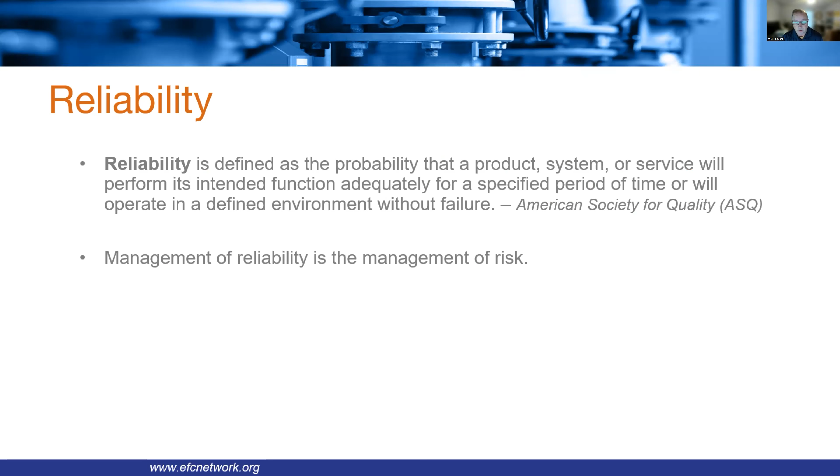Management of reliability is the management of risk. So what's the definition of risk? Risk can be defined as the probability or likelihood of an event or situation occurring that may result in adverse consequences, harm, or negative outcomes. In everyday life, risk is often associated with uncertainty and potential loss, damage, or unexpected events. It involves addressing the possible outcomes, their likelihood, and the potential impact they may have on one's objectives, assets, or well-being. Managing risk typically involves identifying, analyzing, mitigating, or controlling potential risks to minimize their negative effects and make informed decisions. The flip side of that is opportunity.

So what does reliability really mean? For customer satisfaction, that means no surprises for loss of city water to their home or business. Customers are well informed ahead of maintenance, the reason for the maintenance, and able to give input on the maintenance if it severely impacts their operation or health. Reduced operating costs can mean motors and gearboxes are laser aligned and run with fluids appropriate for their operating temperature, load, and operating environment, and not just according to the manufacturer's recommendations.

LED lamps are even used as appropriate to help reduce energy spend, along with reduced chemical and energy spend overall.

Chemical feed pumps are calibrated regularly, and leaks in the system and distribution system are identified and corrected. Those leaks can cost a lot of money. Last I heard, most systems have about 20 to 25% water leakage in their distribution system, so that's a huge impact on the plants. There's a lot of energy that goes into pumping and chemicals used on water just to get dumped in the ground, and fixing that has been a big endeavor for almost all utilities.

Improved compliance means QA/QCs for analyzers are a way of life, done at intervals necessary to maintain compliance. Operational preparedness means knowing consistent system conditions when there are large community events like holidays, and distribution or collection system maintenance happens ahead of time, so operators can plan for adjustments in advance.

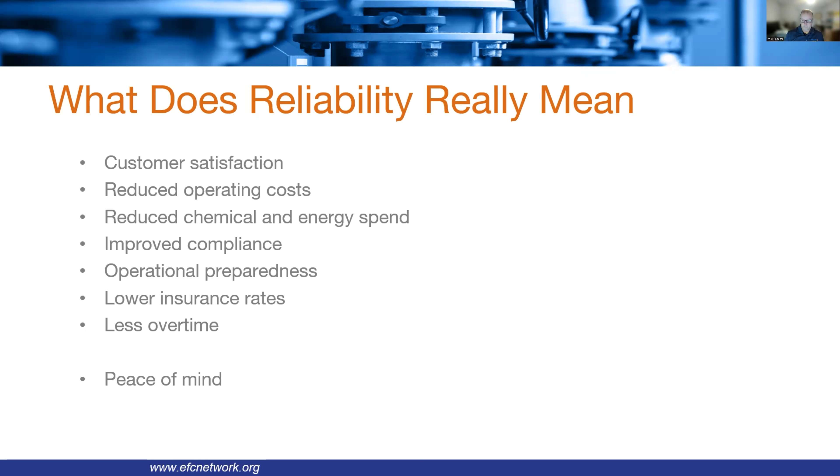So reliability is really risk management. For operations risk, consider: my primary ferric chloride pump just failed—did I know the backup ferric chloride pump was down for service? For safety risk: did I know there was a chlorine leak before I went into the room to make a feed change?

Have my chlorine leak detectors been bump tested? For quality risk: my effluent chlorine analyzer says we're in compliance—have the operators been doing rounds to bench test our analyzers? Have we done QA/QCs on all analyzers, and how do we know?

Financial risk: our operator says high service pump one, which can produce 20 million gallons a day, is vibrating so badly you can feel it when you walk in the room. Did we know that condition beforehand? Did we have a plan to pull and repair it safely? Did we budget for renewal and replacement of that pump? And how quickly can we get it rebuilt?

Environmental risk: we use aqua ammonia in our post-treatment and store it outside in large tanks. Have those vacuum relief valves on the tanks been tested? Have the pressure relief valves been tested? Has the tank thickness been tested, and how often has this been done? There are other compliance risks and others—these are just examples of risk and things that need to be managed to mitigate them.

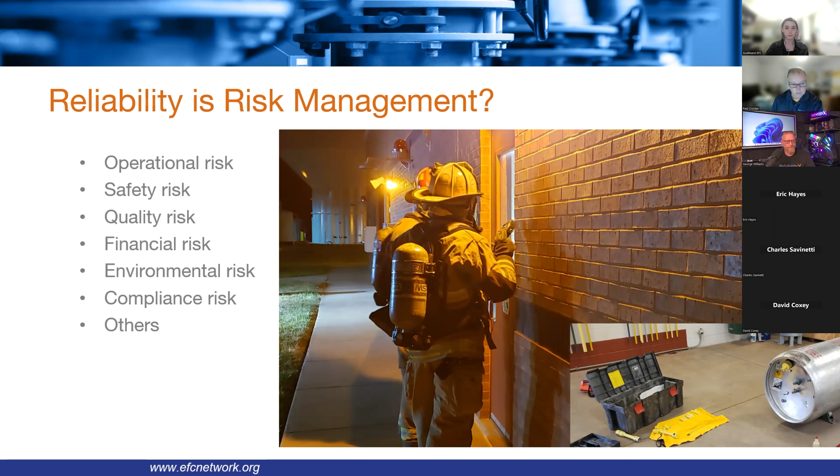Often in water utility plants, redundancy is built in to help mitigate risk. Mathematically, if we've got a couple of redundant pumps at, say, 99% reliability individually, the system itself is now at 99.99%. However, as soon as one of those redundant pumps fails or is out of operation for maintenance, you've lost that redundancy and the risk is immediate. So maintenance and reliability isn't only about building in redundancy to reduce risk, but also managing the risk once that redundancy disappears—we'll talk all about that.

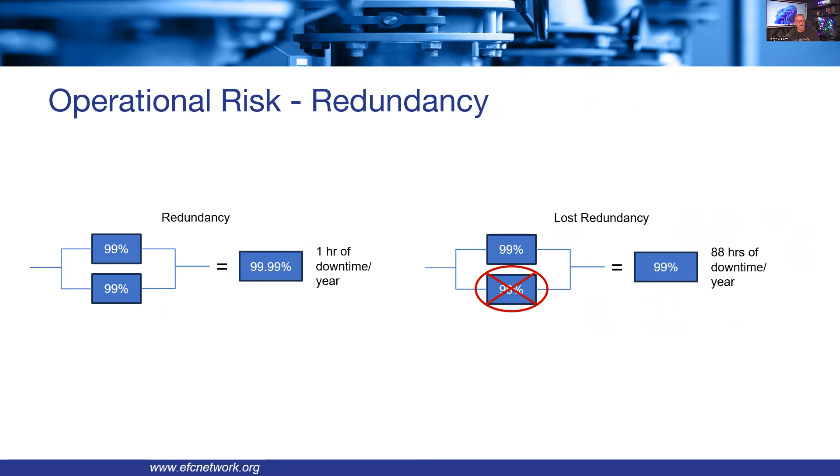From an ANSI standpoint, the average mean time between failure—the average lifespan before some component fails, whether it's a seal, a bearing, or impeller wear, whatever the case may be—is about 2.5 years.

For organizations that are more reactive, meaning they run their equipment to failure, that average is only 1.5 years. For organizations that are very proactive, actively utilizing predictive technologies or robust preventive maintenance strategies, their average mean time between failure is 4.5 years. So you are three times more likely to have events if you're a reactive organization than a proactive one, and of course each of those events has a cost.

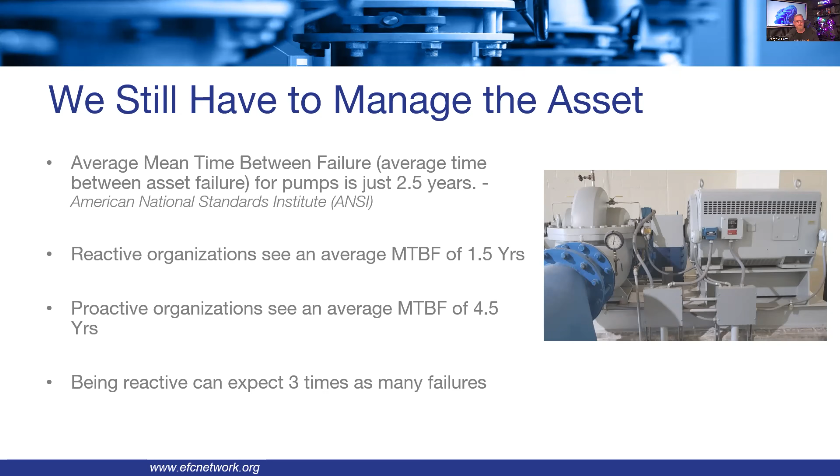In addition to just the risk of the organization from an operational perspective, there's also a safety risk involved in being a reactive organization. What you see on the screen are 2 studies from independent sources. One is from a gentleman named Ron Moore, who's the author of Making Common Sense Common Practice and has been in many, many facilities to do studies. Most of where he's at is in the manufacturing space, but the same rules apply. The more reliable the plant is, the better the safety record and the lower the recordables are.

On the right-hand side, we've got a study from 2000 from the American Society of Safety Engineers that looks at executing your PMs on time, a reduction in overall equipment downtime, and the impact that has on the safety record. You'll see that all of those trend lines are going in the right direction, which is down. This is a documented, quantifiable set of data that tells us that a reliable plant is a safe plant, and a reliable plant is a compliant plant.

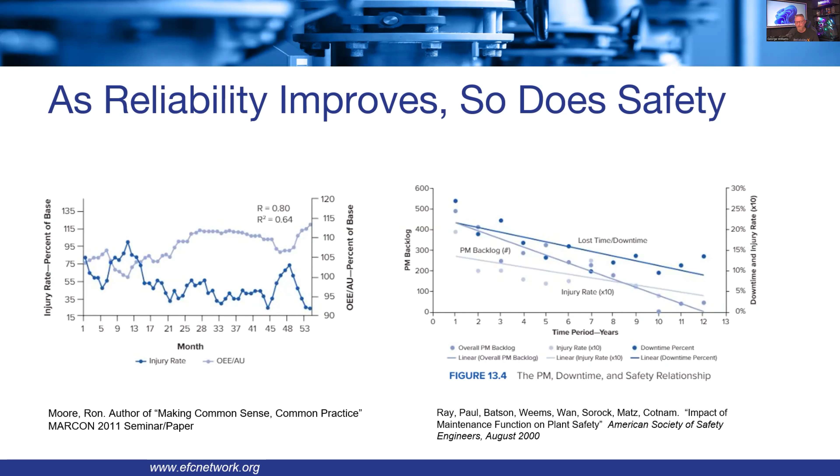If we think about reactivity and proactivity in simpler terms, the difference between a Model T Ford that's currently rotting in the earth and one that's drivable and in pristine condition is not just how well the mechanic took care of it, but also how well the operator took care of it.

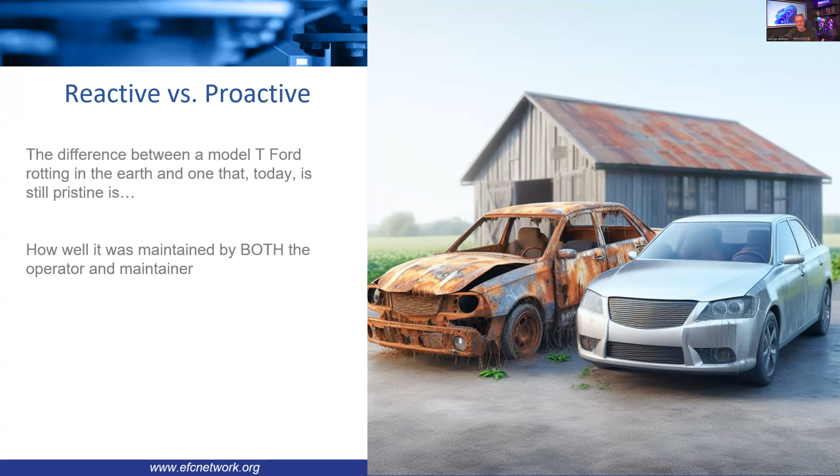So reliability is really about what are we doing physically with the asset? How are we interacting with the asset? How are we inspecting it? How are we maintaining it from a preventative maintenance perspective? What are all the activities that we do to help ensure its longevity of life and its risk mitigation factors associated with plant operations?

We've really got 3 choices, and we'll dig a little deeper into this in the next couple of slides. You can either spend too much and be incredibly reliable, but wasteful because we're spending too much. You can spend too little, at least your budget can say we're going to spend too little, and be very reactive and have excessive failures and have to rush order parts in. And what that leads to actually is more waste, because you're going to spend more than is necessary to keep the plant in operation. Or you can manage the risk appropriately between the risk event and the cost of mitigating that risk and be at the more optimal cost level.

So it's really just one of 3 things to do. We can spend too much and be really reliable. We can spend too little and be very reactive, in which case our costs go up. Or we can manage the risk appropriately and spend an optimal amount of money, have a good, clean plant, a very compliant plant, and a very safe plant.

So what's the difference? A reactive environment will have basic PMs, often on things that shouldn't even be PM'd, like checking lights or room lighting. There are limited inspections, not inspecting the right things, limited or no use of predictive technologies, or when they are used, training wasn't given adequately for those technologies.

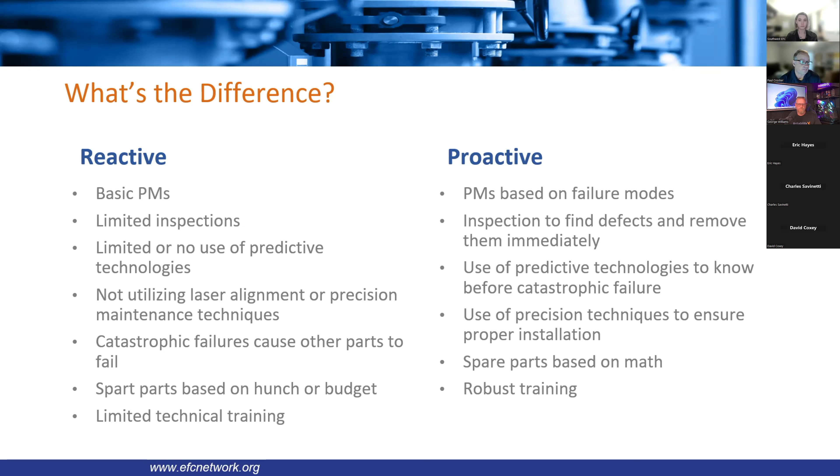So the bottom line here is that we have to take care of our assets. Otherwise, the assets are going to manage us. You've got two choices. You can actively manage your assets, or your assets are going to manage your day-to-day operation. If in your head you think about the plant on a day-to-day basis, if each day there's a different emergency and somebody has to respond to that from a maintenance perspective, then the assets are managing you. They're managing the operation and they're deciding what you're going to do and what you're going to spend.

In the inverse of that, when you're actively managing asset risk, there are technologies and human intervention ways to ensure that the asset is giving you a good health indicator. You're checking the condition of components that fail. Generally speaking, the asset as a whole is not what fails. The parts fail. And there are methods to assess the condition of those parts.

Some of those parts are designed to wear out, like the brakes on your car. Some of those parts are designed to last a lot longer if you install them with precision, versus if they're not installed with precision and they just don't last as long. And so we have to actively manage through a strategy how to take care of each and every individualized asset so that we can be at the appropriate cost and have the appropriate level of risk in the organization.

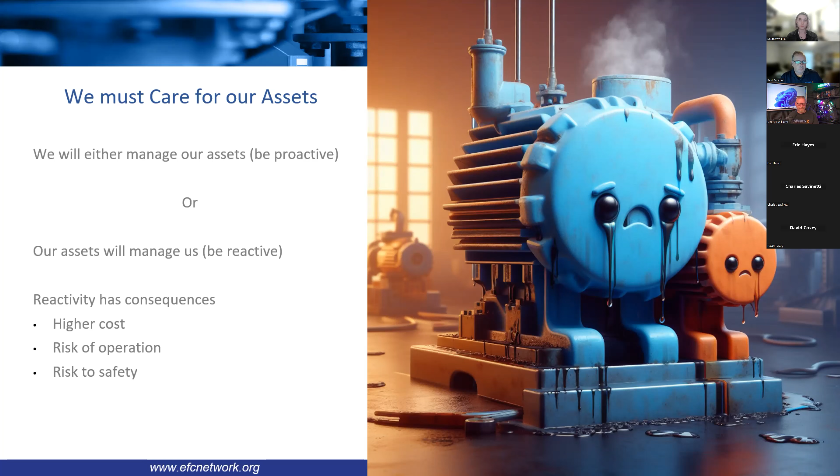To sum this up, your assets have an attitude. Whether you like it or not, they don't care about your budget. They don't care about the board. They don't care if you're a small utility or a large utility. They don't really care if you have to go to a recital or a soccer game tonight. They're going to fail at the most inconvenient time. They just don't care about your desires.

It's not about your desire. The board can say, I only want to spend X on maintenance, and you're still going to spend more. The reason you spend more and pull it out of another fund is because you didn't spend the appropriate amount of funding to keep the asset at a minimal cost.

There's just not - when you buy a car, you either buy a Toyota Corolla or you can buy, I don't know, back in the day, a Yugo. They have a completely different expectation of reliability and a completely different expectation of cost to keep them operable. It is baked in, it is designed in, and you as the operator don't really get a choice.

If you decide not to change the oil and the engine seizes, that's the choice you made. I guess you do get a choice, but it's about whether or not you're going to do the appropriate level of maintenance required for the design of the asset that you have. And if the choice is we're going to spend less, you will ultimately spend more. And that's just kind of how this works.

And so the reliability is about understanding and coming to the conclusion of what the right spend is. Not too much, not too little. How do we manage the risk and keep the cost as low as possible?

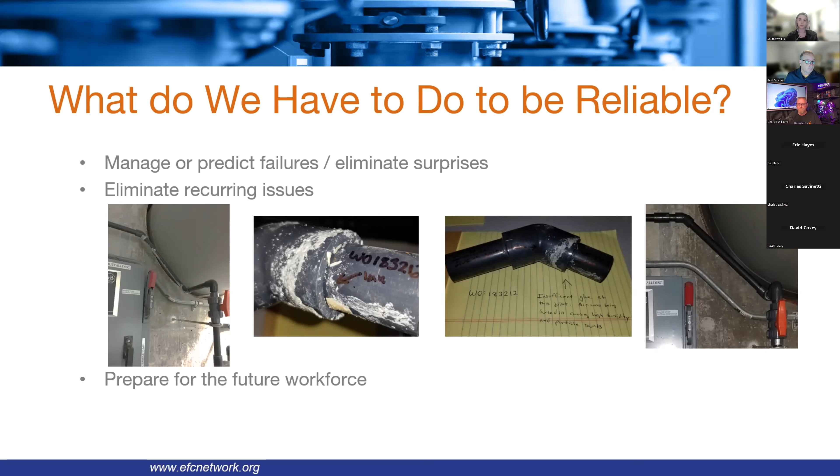Use of technology can give you an advance notice. If you haven't started anything at all ever, then lubrication analysis should be your first go-to, especially for equipment that has oil in it that you can pull samples from. That one's cheap and easy — it's $35, you send it to a lab, they do an analysis and give you some things to do to address what's seen, and that can be tracked and trended over time so you can see how your efforts to correct those situations play out.

Ultrasound for structure-borne and airborne is another great tool. It's easy to acquire, fairly inexpensive overall, easy to test and use, and it can be used on all kinds of things. We used it to find chlorine leaks on valves that we wouldn't have found any other way, tank thickness with ultrasonic thickness gauges, infrared thermography and vibration...

Analysis and motion amplification are some very advanced techniques. Only the very largest of plants can really afford to bring those in-house because they take specialized training and skill. Even though infrared thermography seems simple, it's deceptively not simple, and it really requires somebody that's had training on using that. So those are things you can outsource.

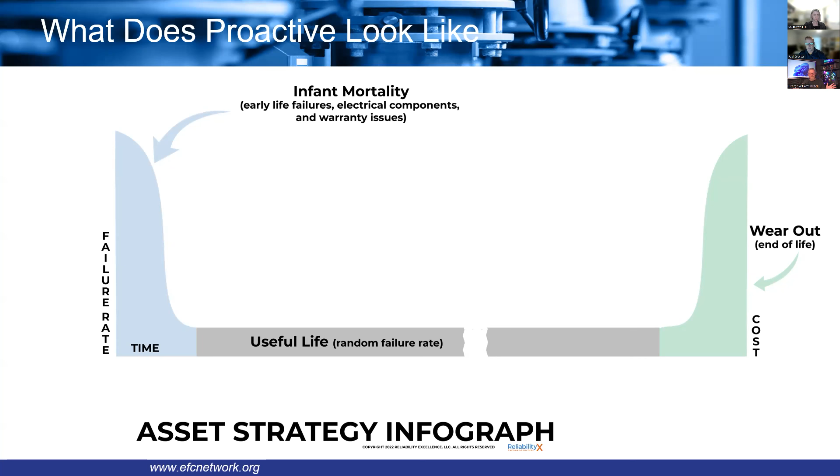Just doesn't happen, really, really low probability. That means all the events are random. If I take a grease gun and don't wipe it off really good, and I squeeze in a speck of contaminant into one of those pump bearings, eventually that bearing is going to fail before the other bearings in the other pump. That's just the way it works.

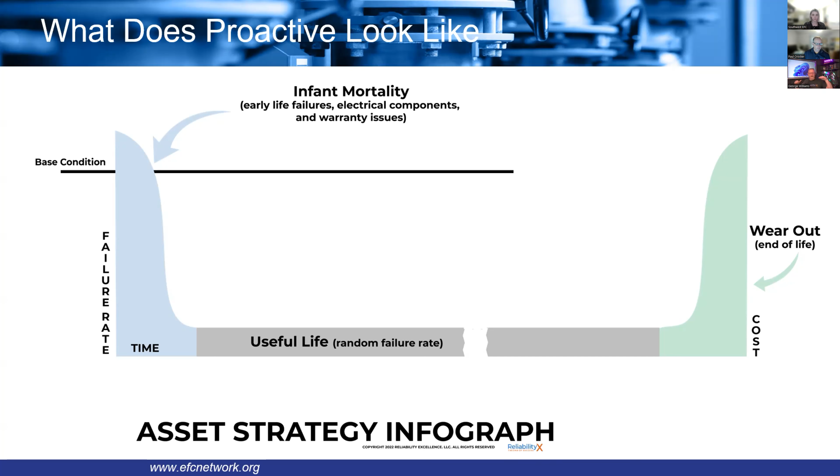All of our assets are designed with a base expectation of reliability. So just like I said a couple slides ago, I've got a Toyota Corolla or I've got a Yugo, that line is somewhere else. The maintenance organization's role is to manage deterioration. As the lubricant deteriorates, maintenance shows up and relubricates, restoring back to base condition. As a belt wears, they inspect the belt, replace the belt, restore back to base condition. This happens over and over throughout the life of an asset. Maintenance's role is to restore to base condition, protect the asset.

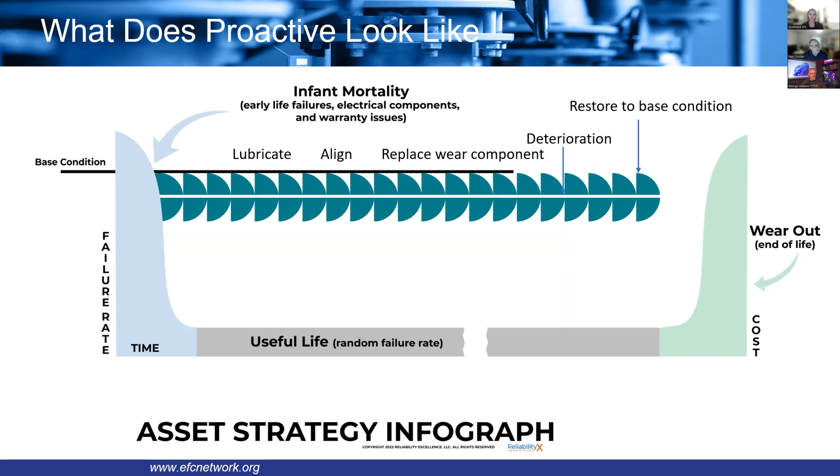Techniques such as designing something more robustly, we call that design for reliability, allow us to raise that expectation level because we're designing things to be more reliable. In addition, we create PMs based on actual failure modes and not OEM recommendations.

You didn't walk around your car this morning. You didn't check all the tire pressures. You didn't check your fluid levels. You didn't check the left turn signal. You didn't do those things because, in terminology that we use, the risk priority number is low.

Inside the cab, you've got a light that tells you your tire pressure is low. Inside the cab, the blinker blinks faster, so you know it's out. There are what's called detectability methods. So when we develop a PM strategy, we utilize techniques that address only the failure modes that create risk, and we address them appropriately.

This means that our deterioration curve changes. We visit the assets less often, but we're still managing the risk appropriately. That lowers our base cost.

We utilize the techniques like Paul was talking about, because eventually this unit is going to fail. I put a contaminant into the bearing. Paul uses his ultrasound gun, he hears that this bearing now has a problem, and he has plenty of time to plan the intervention. He can order the bearing ahead of time, it shows up on site. If we can't do without the asset, then it gets staged and it's ready to go for when it finally fails. If we can schedule it appropriately, we have plenty of time window to schedule it when it's least impactful to the operation. It's always impactful, but we want to schedule it when it's least impactful.

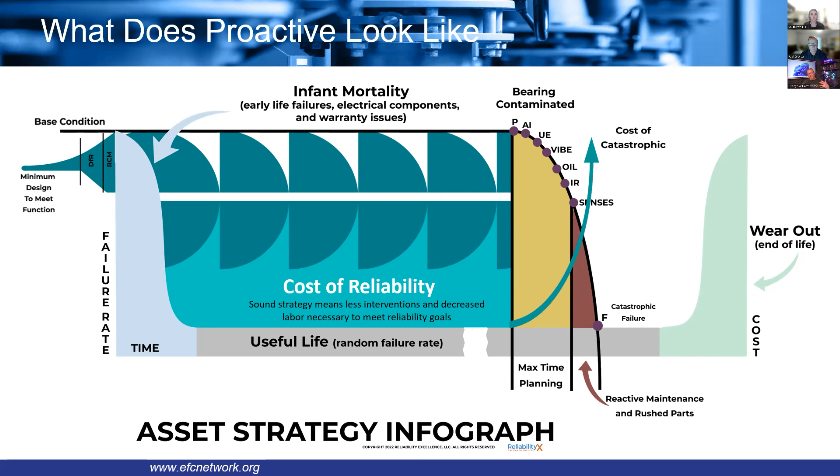So my costs go up when I have the catastrophic event, whereas when I'm proactive, my costs are minimal and I'm only replacing what needs to be replaced.

For just a basic example of this is what we're looking at here. I can replace just the one bearing, or that bearing can have a completely reactive approach. And when it blows apart, the shaft gets scored, the volute is scored, the impeller gets worn and damaged, and now it's out of balance. Maybe the seal goes, and I've got all kinds of other costs.

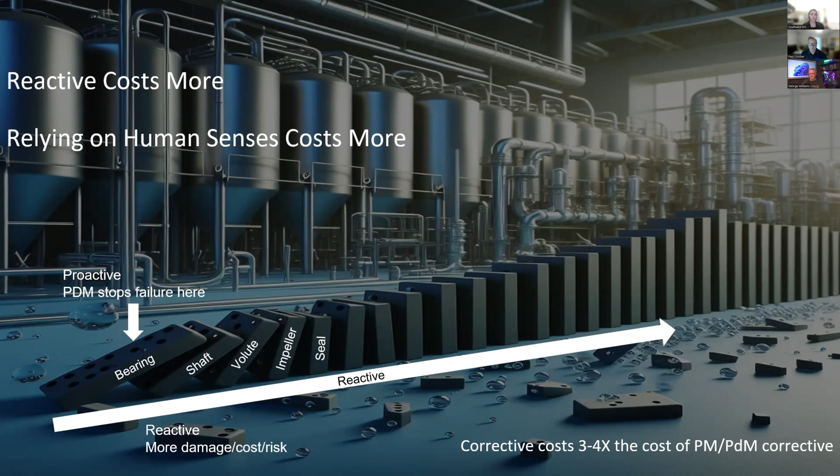The common denominator here is that a reactive maintenance work order typically costs about 3 to 4 times what it costs to do a PM. So if I am finding things with technologies, I will spend a third less in parts. That's significant, it's a huge, huge difference.

This is an example of one of the other ways that you become reliable: eliminating recurring issues. This is an actual slide presented with one of our clients.

This is on the wastewater side, and what you're seeing on the screen is a screen. Their air release valves kept plugging with grease, which is a really common issue on the wastewater side of things. So they very regularly would be taking these things apart to clean all the grease out and putting them back in over and over again all year long.

We helped them with what's called a root cause analysis: why are they plugging up? We worked with their team to redesign - well, I say redesign, but they bought like a $5 screen at Home Depot and put it on the bottom of these valves. They cut out the volume of rebuilds by about 80%. So much so that they went back to the valve manufacturer, and the valve manufacturer is trying to figure out a way to incorporate a screen in the design so that the rest of their clients don't have to have this issue. Finding recurring issues and making recurring issues disappear is another way to become reliable.

There's a bunch of examples here that I'll let you read through - I'm not going to read bullet point for bullet point. And I'm sure, Paul, you've got examples of doing this on the water side. Why don't you give us one of those, Paul?

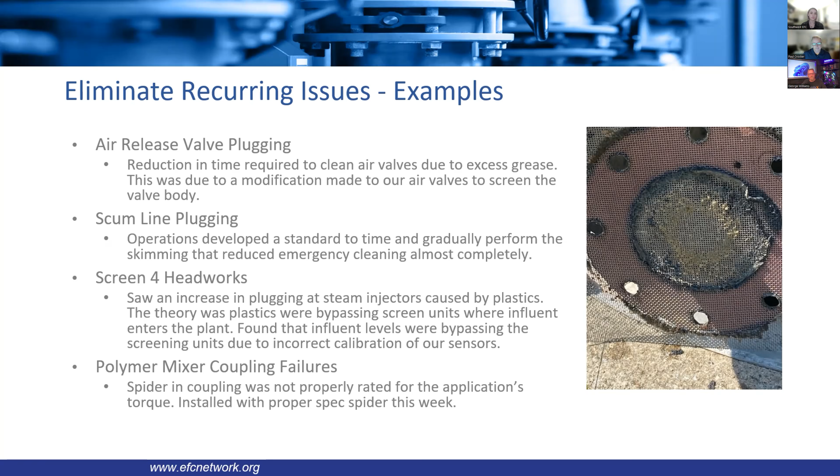So what's next? The third thing we got to take a look at is the skilled labor shortage. This is significant today. Right now, there's a significant shortage of skilled labor across the entire United States. And while longevity typically in utilities has not been an issue, eventually the folks that are there are going to retire or maybe even get promoted.

And the people that are going to replace them don't quite have the skill set of the folks that you may currently have. This is not a guess. This is not an opinion. This is reality, from an organization called Scientific Management. They have a mechanical aptitude test, and they will come into your organization, and you can even become qualified to give this test so that when you hire folks, you can give them a mechanical aptitude test.

They have tracked every score from everyone who's ever taken this test from 1971 until today. And since about 1995, the average score has more than cut in half. So what used to be an average of 60, 65% is now an average of about 20 to 25%. That means the people that are replacing the current generation can barely fix a sandwich. I don't know how they're going to fix major pieces of equipment. And so we have to prepare for this.

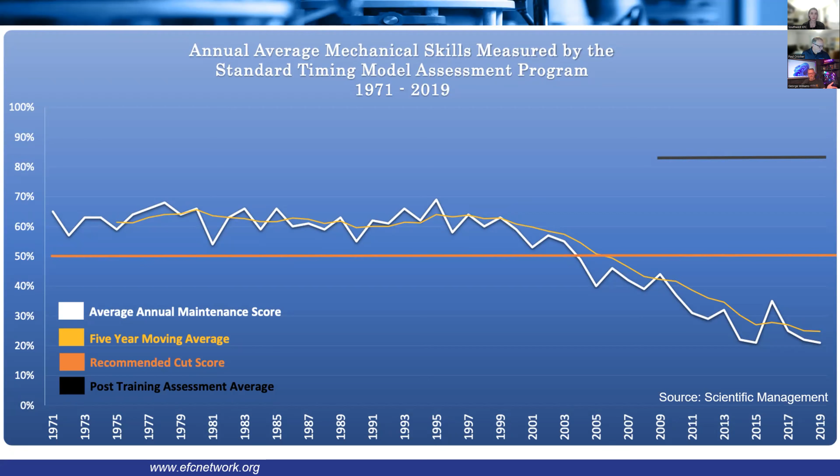Not only do we have to train people to try to close this gap, but we also have to try to reduce the level of expertise required to take care of some of our assets. And so the operation and how they inspect things, and your SCADA or your Delta V systems or whatever system you may be running, becomes even more critical to give you an early warning and heads up, especially for assets where you may outsource the repair because you don't have the internal labor to do it yourself. They may have a higher expertise level than we have internally, but you also want to give them a nice advance notice, get the parts ordered in. If it's a rush job, you're going to pay through the nose. So knowing things ahead of time is significant, but also training our people is going to be really significant as we move forward.

Which is why it's really critical for us to start capturing tribal knowledge. If in the past you felt that the CMMS system, the computerized maintenance management system, or the system you may use to write work orders and track your assets and have your PMs come out, was not really that important, you might want to change your mind really fast, because this is the system that tracks the tribal knowledge. This is the system where you document how to do something to the asset and how you track costs, at least from a maintenance perspective on the asset. And so today, if the tribal knowledge is going to disappear, this system becomes more and more critical to house the information that you need to manage and take care of the asset, and to train your people on how to execute work against the asset.

Really, really critical step here in helping to transition tribal knowledge and ensure that the impact of losing skilled labor, at least for your facility, is less.

And on to that, I experienced that when I worked at the utility. Under me, I had 3 mechanics. Each of those mechanics had between 30 and 40 years of experience and training behind them. All of them had actually come from power plants and the nuclear navy and all sorts of other stuff. They were really, really good mechanics. Unfortunately, though, they were all over 55. And when the first one retired, the next 2 retired within the year of that first guy retiring. So I lost all 3 of my mechanics in 1 year.

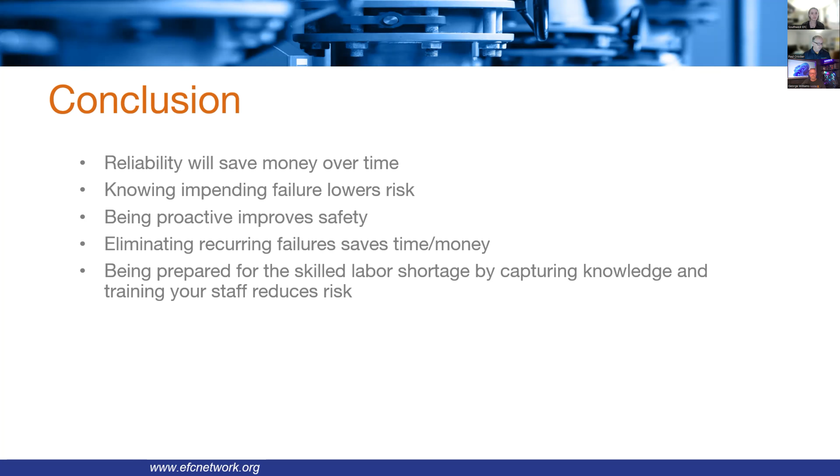I'm in AWWA. I'm in two of the technical committees, the asset management, and the other one is the maintenance and reliability committee. We've been very active in both of those, and both those committees are doing good. We've got some stuff planned for ACE this year and some good sessions for those. So if you'll be at ACE this year or any of the other water conferences where those committees have got some content, those are always great.

There's a lot of organizations out there that focus on maintenance and reliability. Society for Maintenance and Reliability Professionals is another great one where you can learn about these things. I learned a lot going to those conferences. Training, a lot of people offer training. You can learn more about the Integrated Asset Management Framework at University of New Mexico's Environmental Finance Center. That AM Kan Work Asset Management program is there. You can also self-score yourself and see where you're at from an asset management perspective. And then you can learn more about us too at reliabilityx.com.